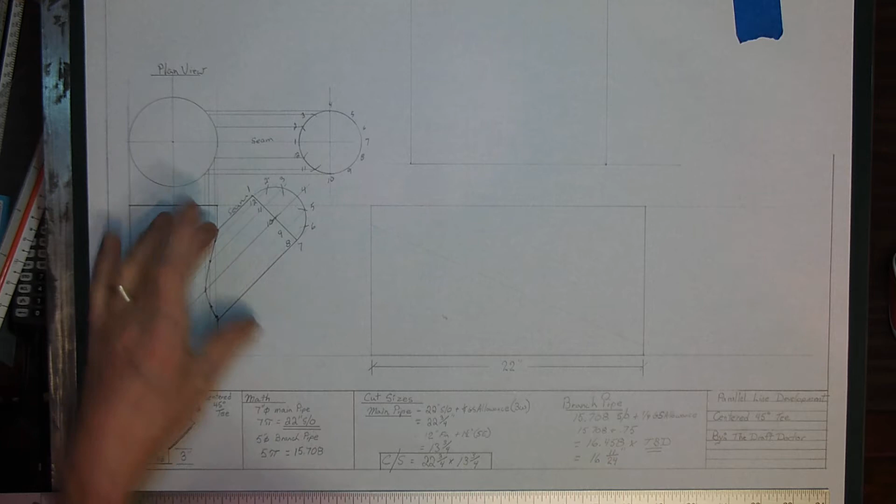Okay, we're laying out a centered T, 45-degree T. We've completed our working drawing. We've divided up both of our branch pipes on our plan view and our elevation view, dividing them into their equal spaces, brought them down, and located our miter line.

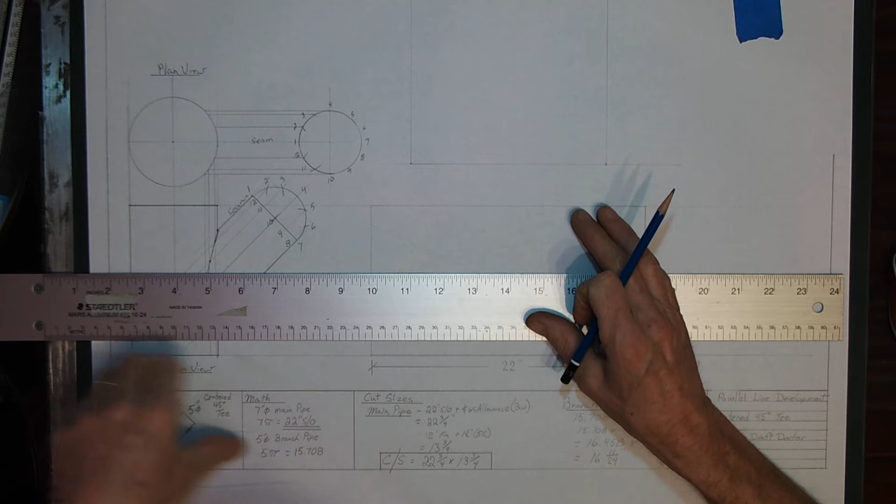Our miter line establishes true lengths of all the element lines on these branch patterns. So my next step is to lay out the branch. What I've done here is I've gone ahead and laid out the stretch out for my 5-inch branch pipe, which is 15.708, and that is this stretch out that we see on the top here.

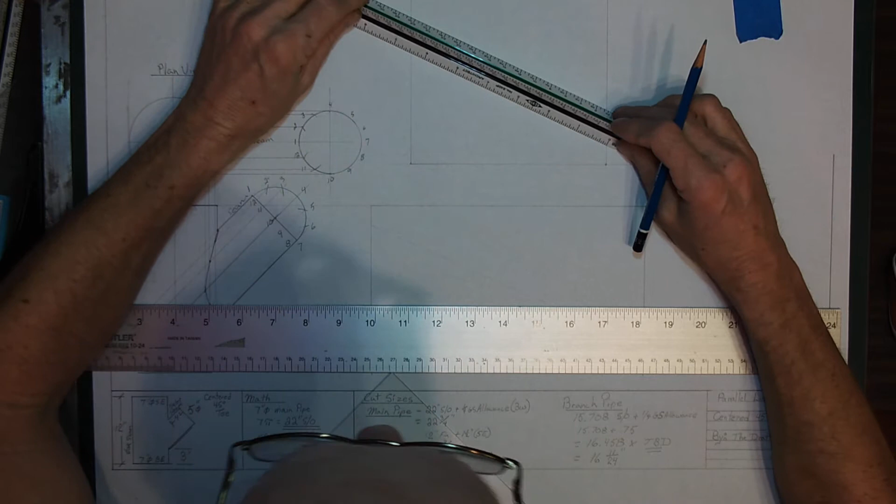I'll darken it in once we're done our complete layout. I have my stretch out. I need to divide this stretch out into equal portions. Let's see how this works. Oh, look at that. If I want 12 spaces and I angle my straight edge at 0 to 6 and mark every half inch, I get 12 spaces.

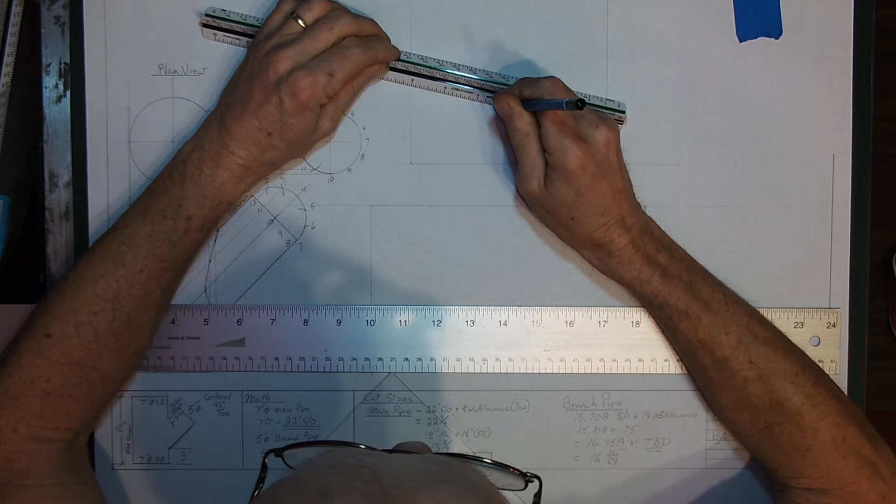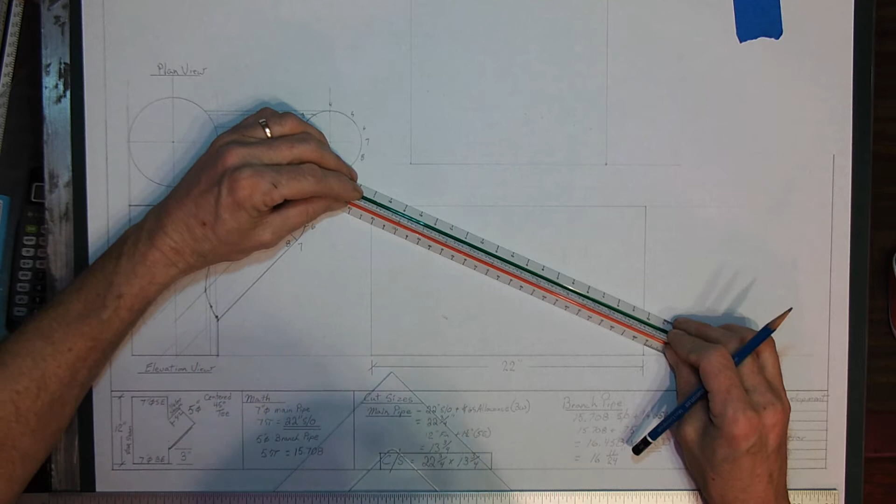While I'm at it, I'm going to do the same thing with my 22-inch stretch out. Here I'm able to go to the 3/4 scale, and from 0 to 12, one end to the other, I can mark my 1/12 spacing.

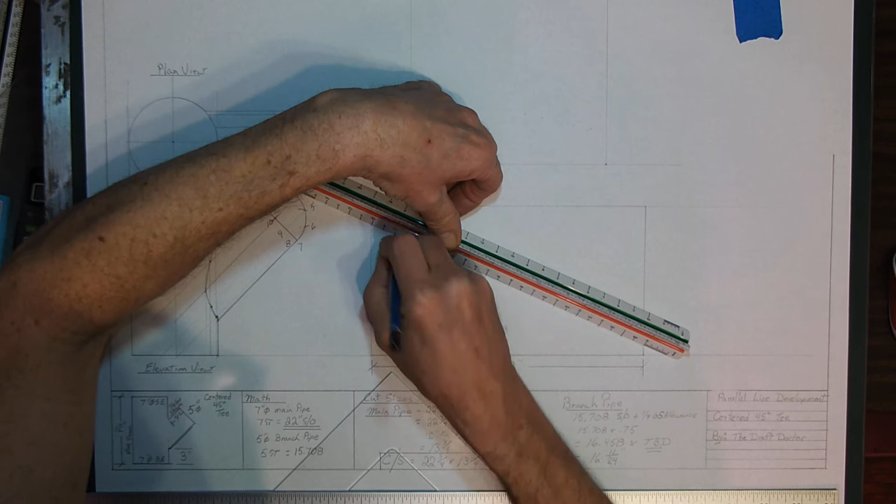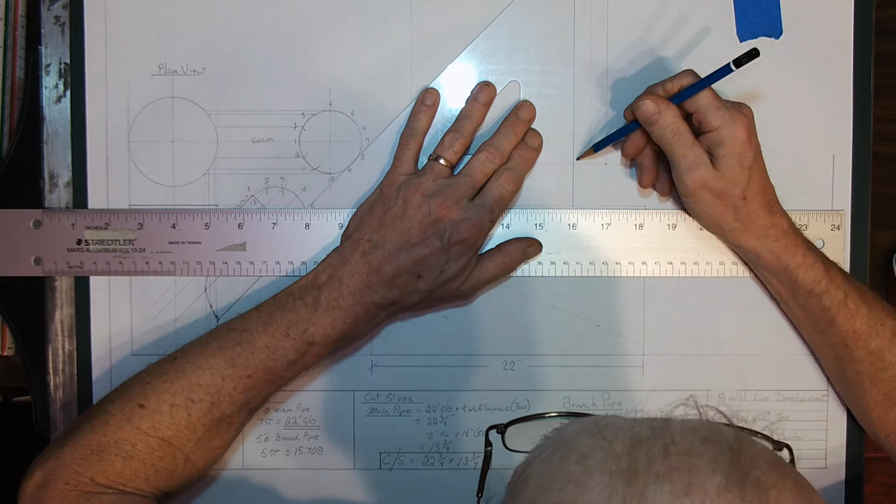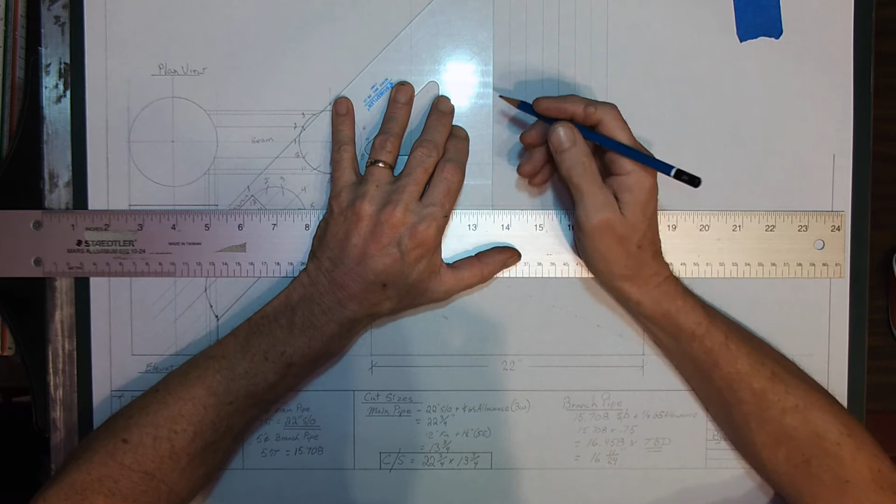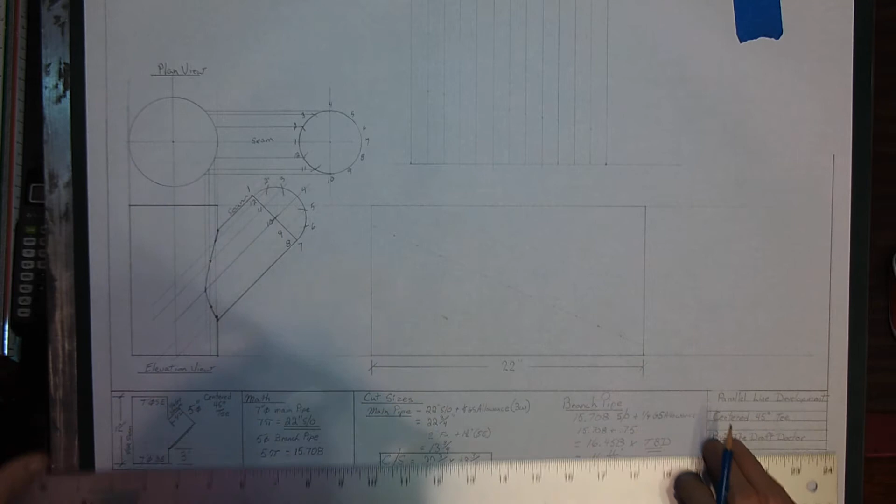I'll take that 1/12 spacing on my branch pipe, extend these lines, and I have my branch pipe all divided up. Let's number it. I start with 1, 2, 3, 4, 5, 6, 7, 8, 9, 10, 11, 12, and back to 1.

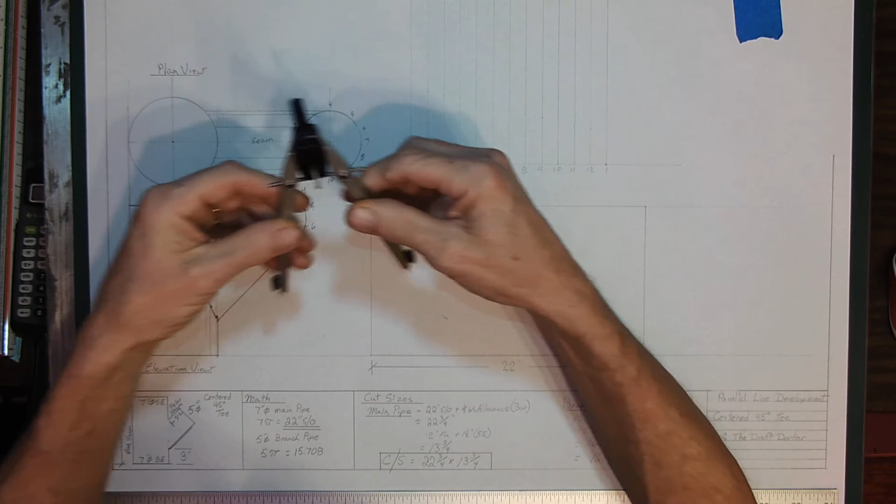Now all I need to do is pull the two lengths off of my working drawing. Here now is the length of my one line. 1.

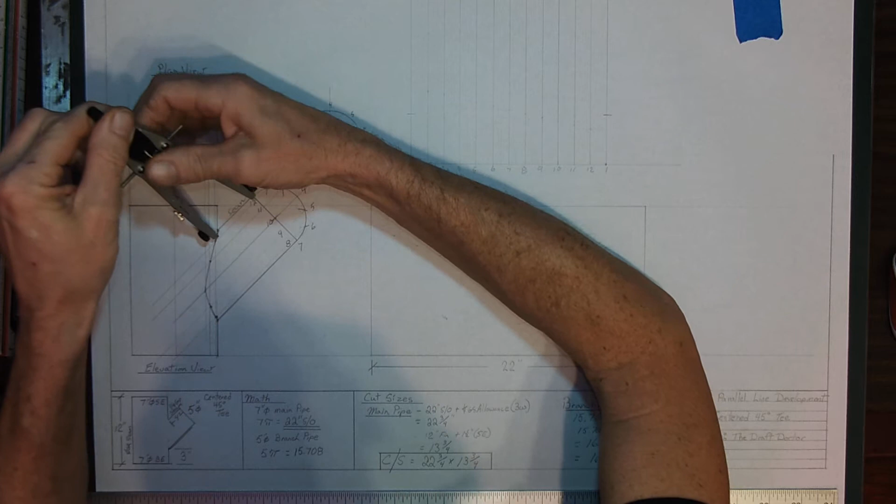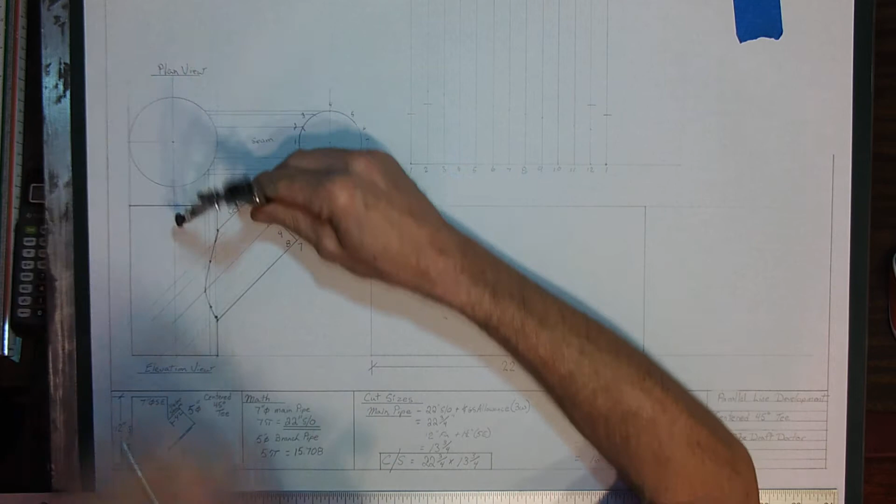Here is the length of my 2 and my 12 lines. 12 and 2. Next, 3 and 11. Right here at the intersection point is a true length. That's 11 and 3.

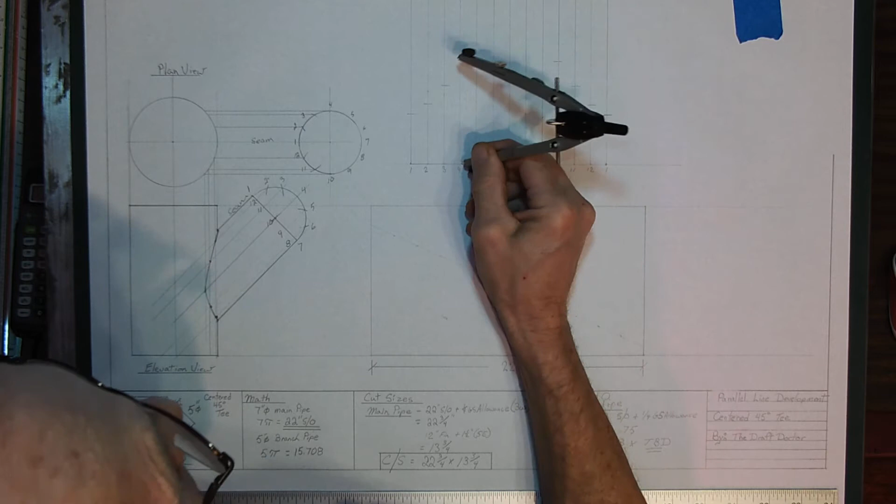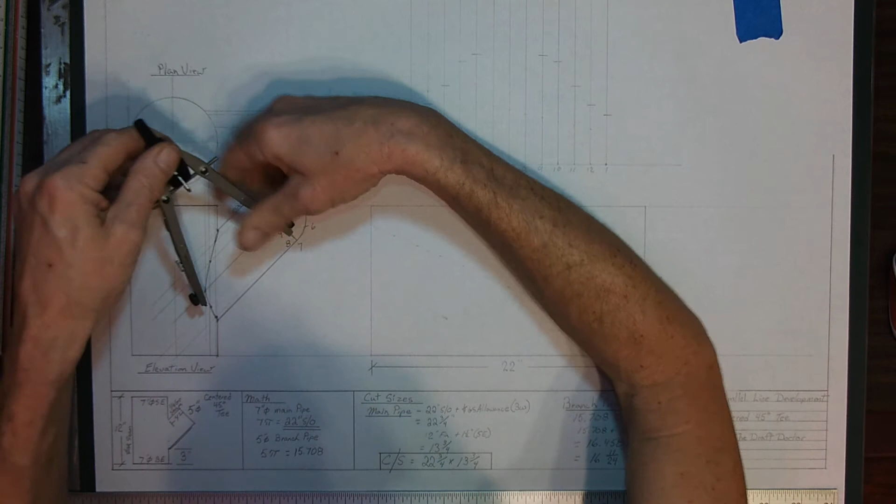Next we get 10 and 4. And 9 and 5. I'm measuring from my finish line to my miter. There is 6 and 8. And finally we have 7.

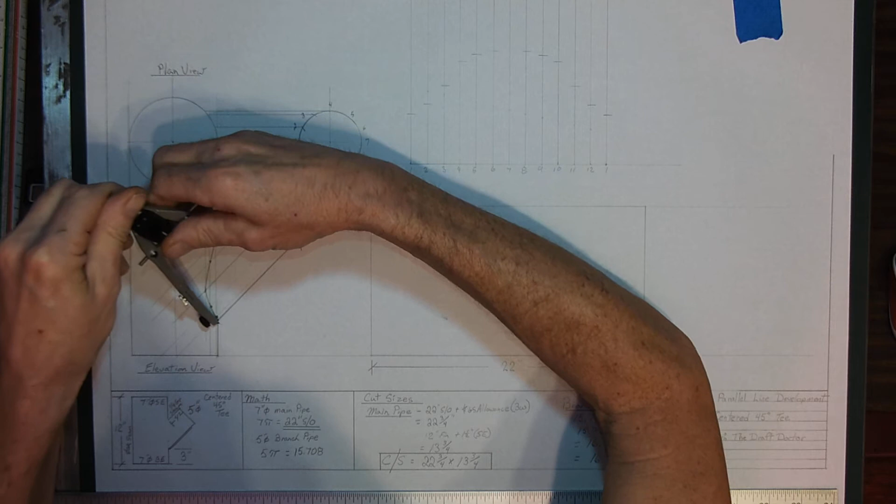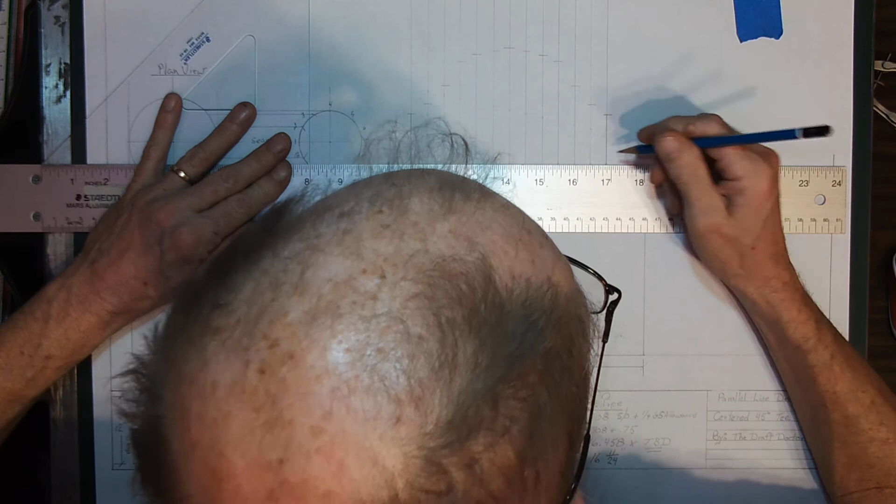We have our pattern. I'm just going to darken it all in now. This is a stretch out, of course, and we will add the seams and the shop instructions, which will all come in on the next video.

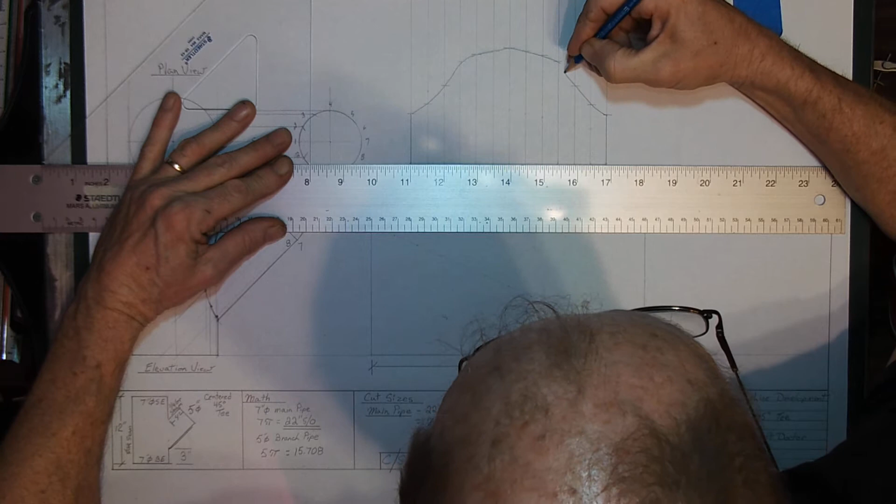Now, the trick to connecting these by eye is to look ahead, look through the point you're aiming at to the next one. And roughly there's my pattern. I could also use a French curve, or a flexible curve. They're all going to work for me. And there I have my branch pipe.

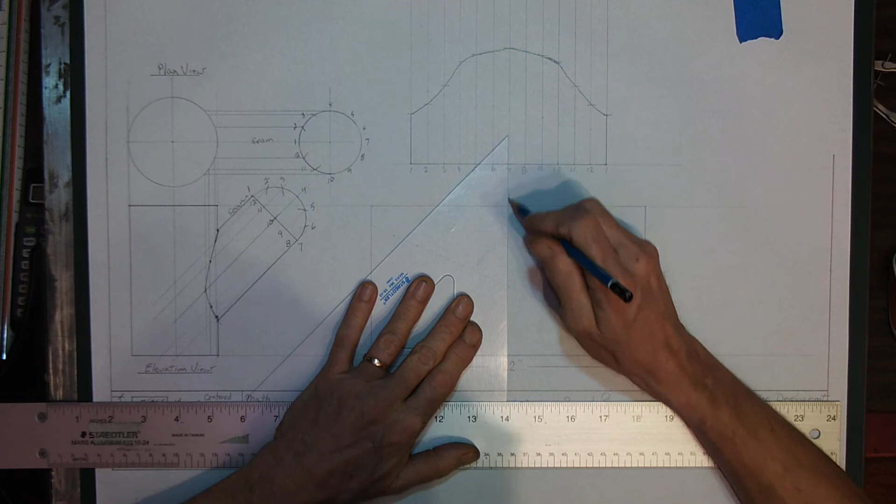Next step is to find the midpoint, and I've already done that when I did my 1/12 spacing here, which I really didn't need, of my branch pipe. Now, if that's the midpoint of my branch pipe and my seam is at the back of my body, then my 1 and my 7 have to be on this line. So 1 will be here, my 7 point will be here. We're laying out the hole here, by the way.

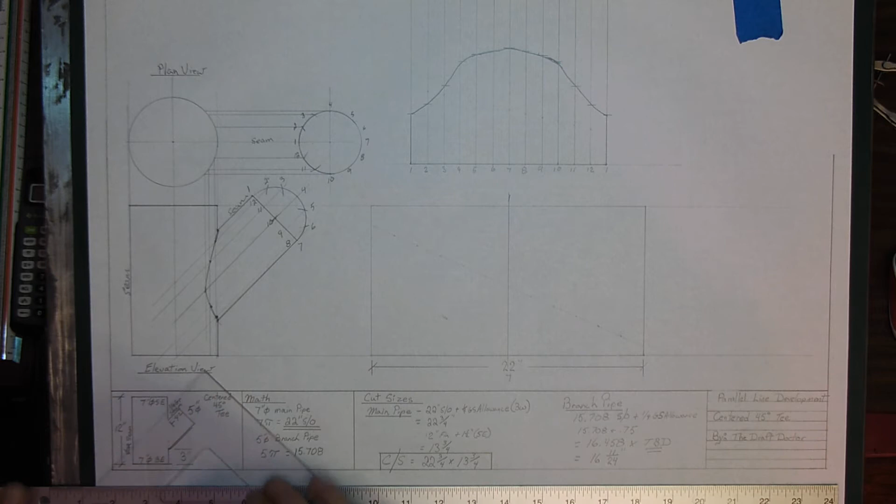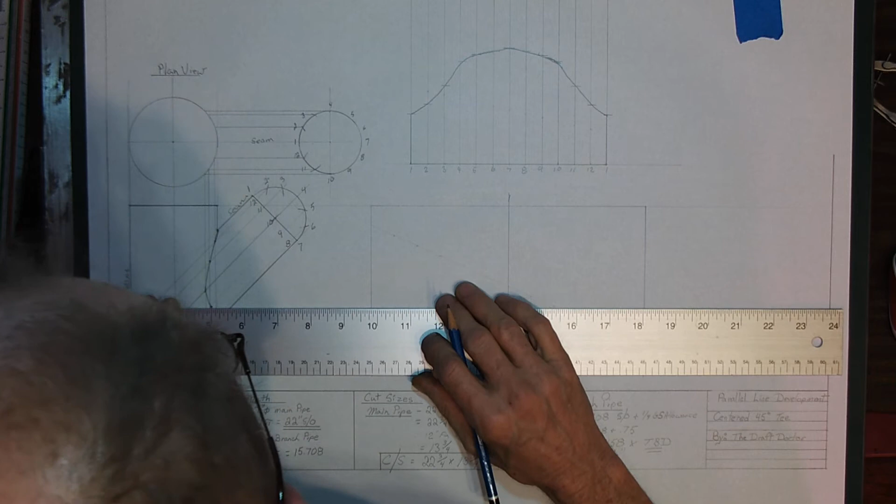Next thing I'm going to do is stretch these across. Here is my 7 line, and I'm going to document it, 7. I'm going to stretch the 6/8 across, and document it, 68. Next, I have my 9/5 line from its intersection point.

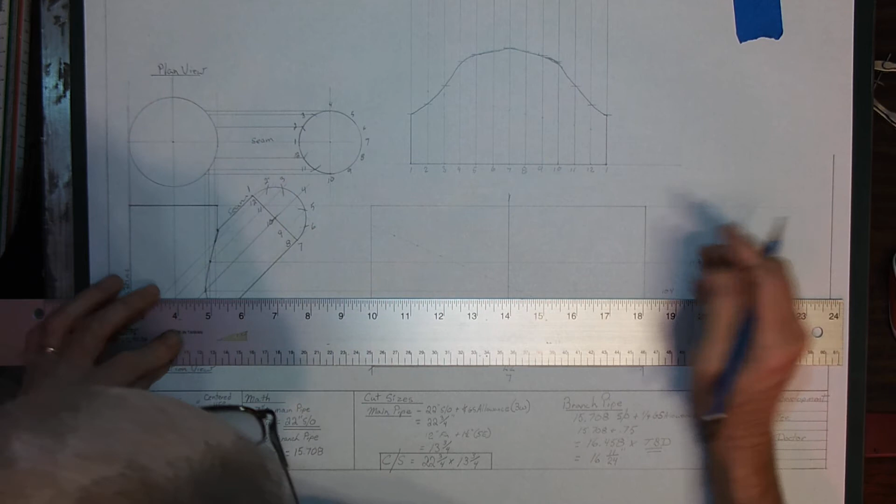Here's my 10 and my 4. Here's my 11 and 3. Here is my 2 and 12. And finally my 1. So there's 1. Here's 7.

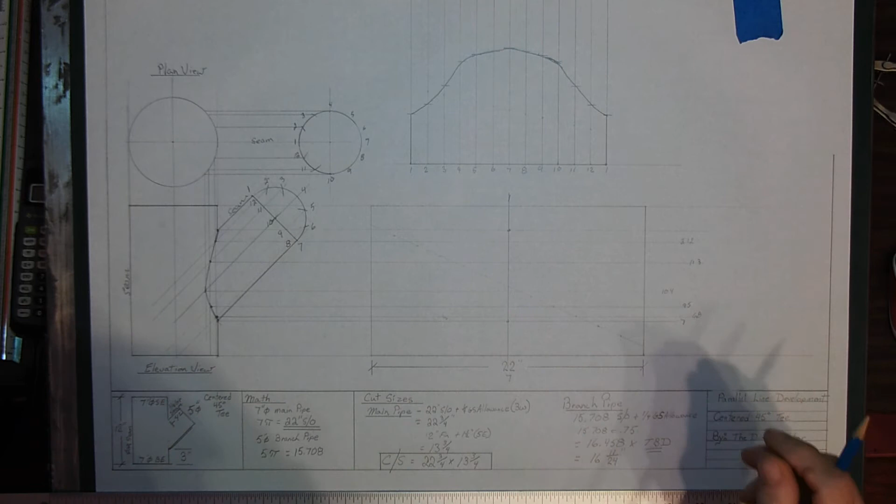Next I have to find the distance between 1 and its 2 and 12, however they land on the pattern. To do that, I'm going to go up to my plan view, and we're going to take a look at the intersection points here. Now, if I'm looking from the inside of the pipe at the branch, the first thing I notice is that 2 is to the left of 1, by this distance.

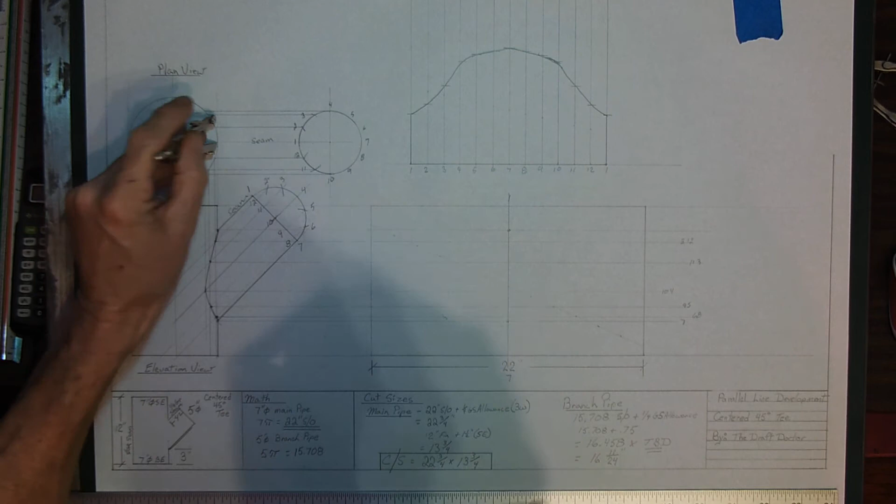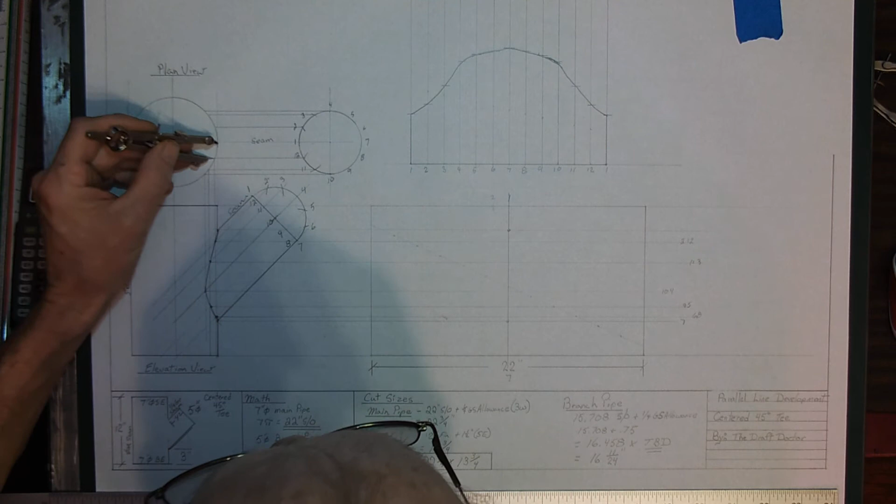2 to the left of 1. 2 is to the left of 1, which would put 2 here. Next is 1 to 12, which is to the right of 1, and they happen to be the same length because our fitting is symmetrical. So my 12 goes to the right of 1. There's my 12.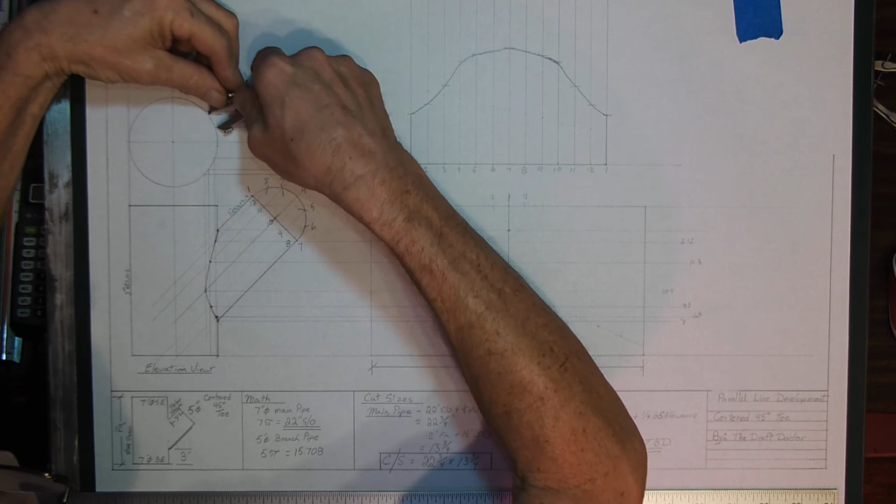Next distance I'm looking for will be the distance between 2 and 3. Now to find the distance between 2 and 3, I'm going to come back to my plan view, and there it is. From 2, I find 3. From 12, I find 11. It's the same length because of the symmetry going on here. Let's document 3, 11.

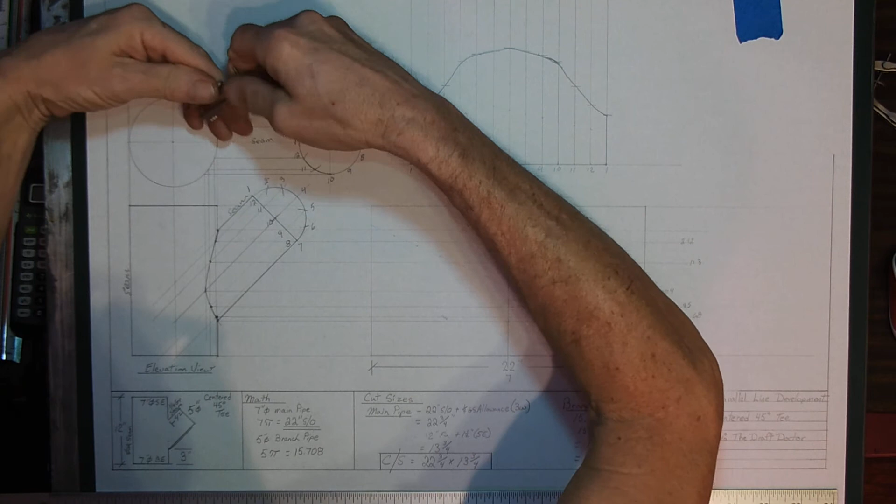Next, from 3 to the 4 is this tiny little increment right here, and it's also the distance between 11 and 10. So, from 3, very carefully here so I don't slip, I find 4. From 11, I find 10.

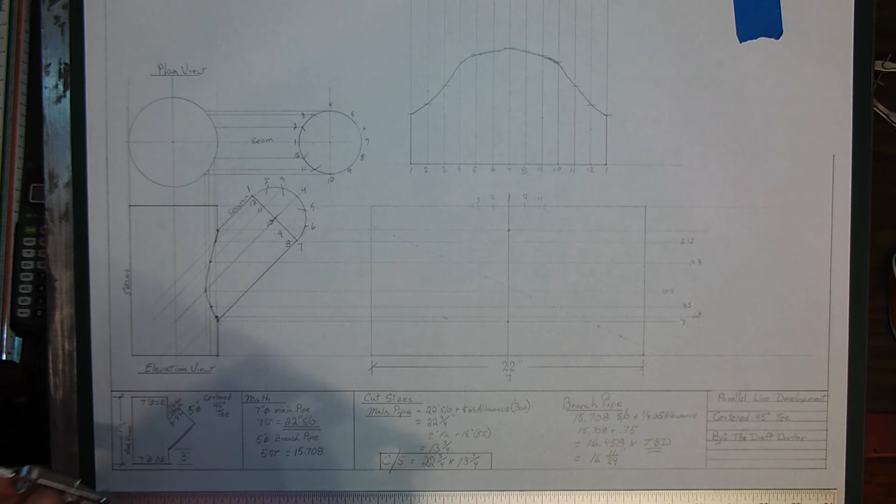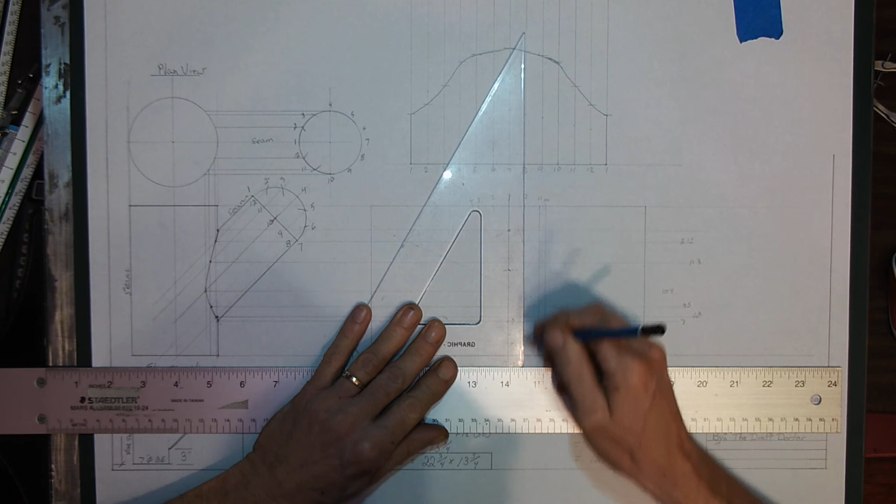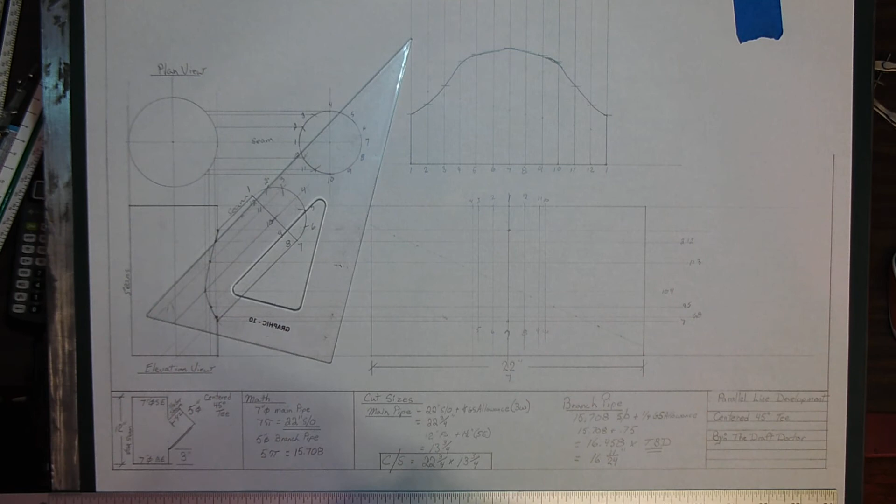I'm just going to draw these down through the pattern. Here's my 10. Here's my 11, my 12, 2, 3, and 4. Well, if this is 1, 2, 3, and 4, then this has to be 5, 6, 7, 8, 9, and 10. Now, here's how I lay out my hole.

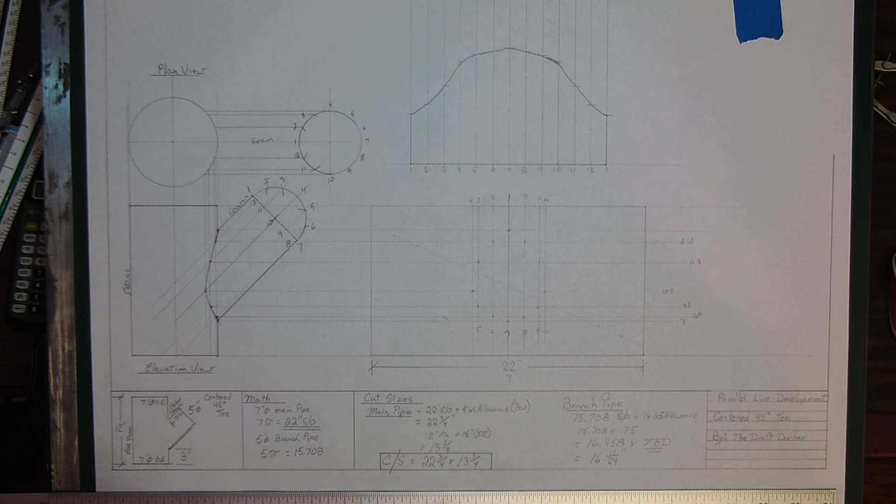7, 1 over 1 up, 1 over 1 up, 1 over 1 up, 1 over 1 up. And I am getting the shape that gives me my hole. I'm going to darken these in so everybody can see it now. Once again, this is a stretch out. We will add seams and shop instructions in the next video.

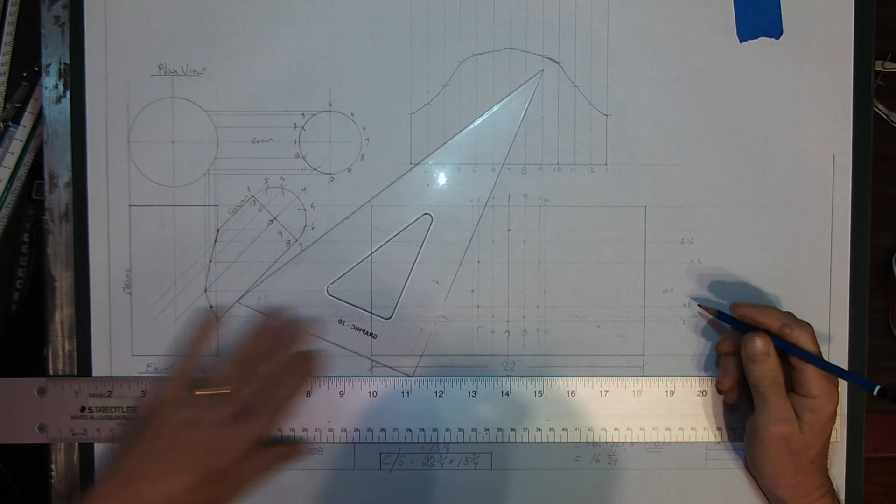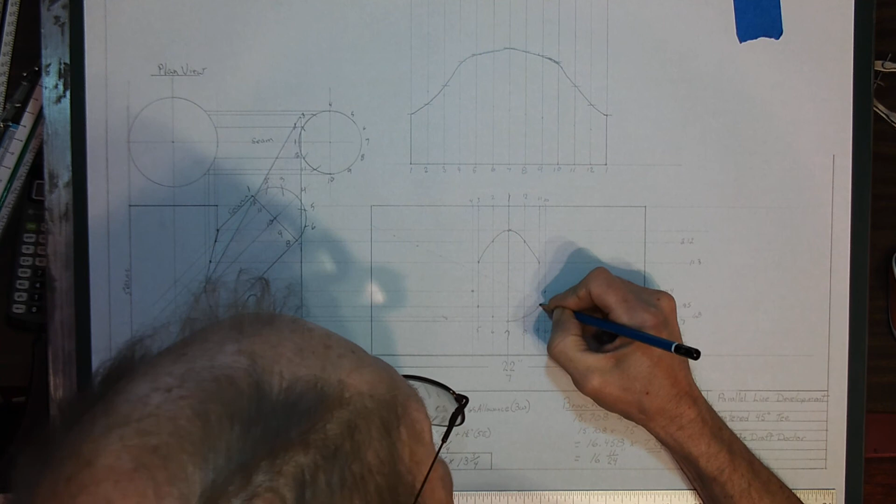This line in reality I wouldn't normally darken, but I want everybody to be able to see it on top of all my construction lines. And now we need to draw in our shape. Bear with me here. There's my hole.

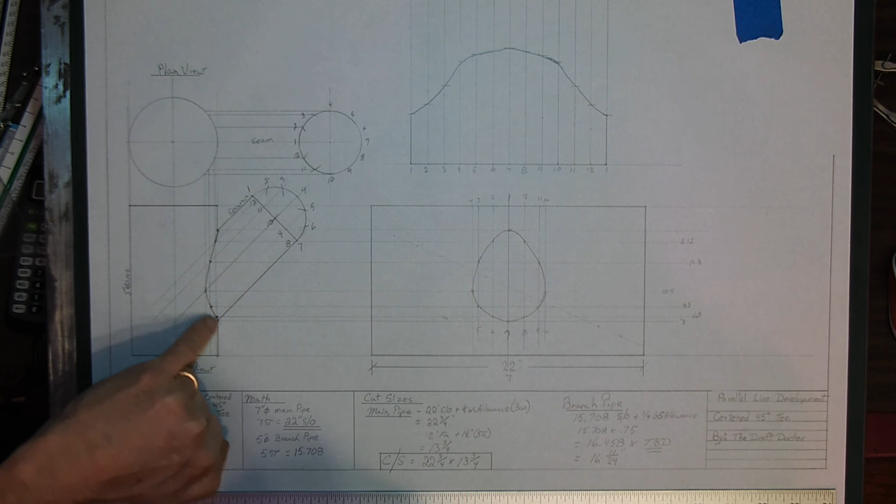So, step 1, we did our math. Step 2, we created a plan and elevation view. We divided our branch pipes into 1/12 spacing and brought them back on the plan view to the body so we could see where they meet the body. Extended them down from that point into our elevation view where we found the intersection points, which gave us the true lengths and enabled us to lay out the plan, or the pattern I should say, for our branch pipe, our 5-inch round branch pipe.

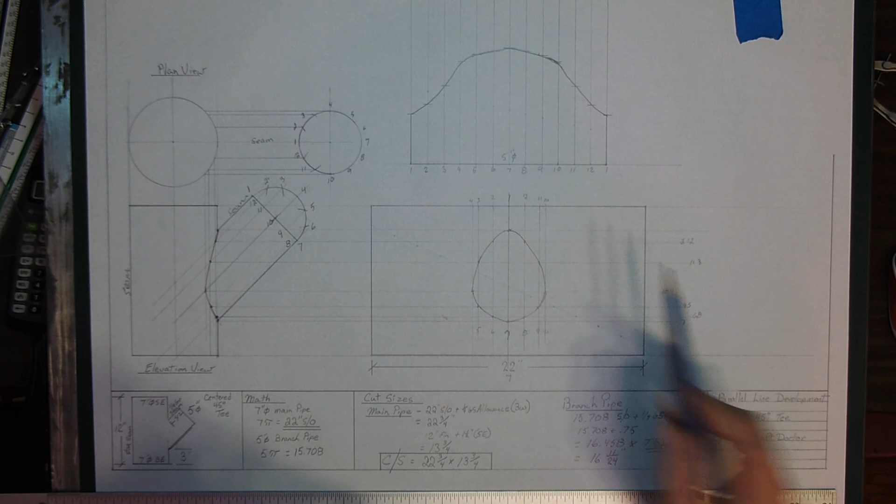Now, from the main elevation view, I extended the top and bottom to give me the elevation for my pattern. We've measured our stretch out. We took our intersection points and stretched them through, and then we found our 1 and 7 in the middle. Went back to our plan view, and looking from the inside, we noted that 1 and 2 had a relationship: 2 is left of 1, 12 is right of 1. So when we came back to our pattern, we put the 12 right of 1 and the 2 left of 1, and from there we built our fitting.

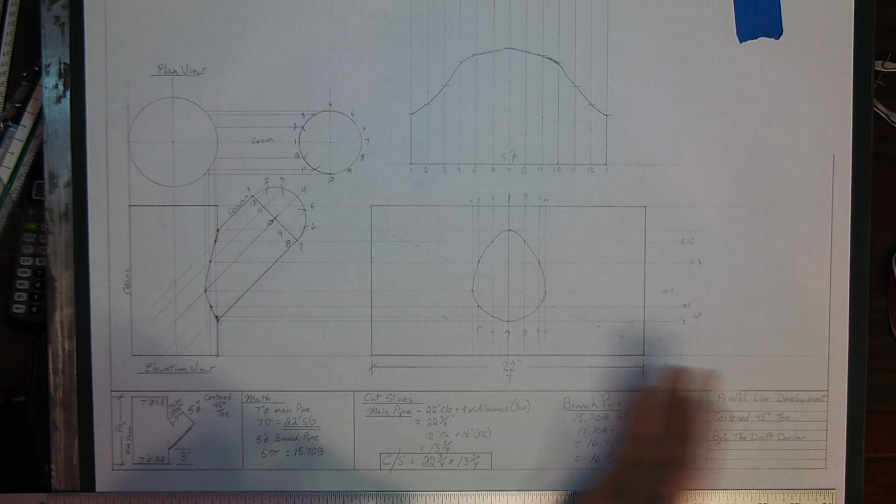Next video will show shop instructions and seams and allowances, and we'll finish this project.